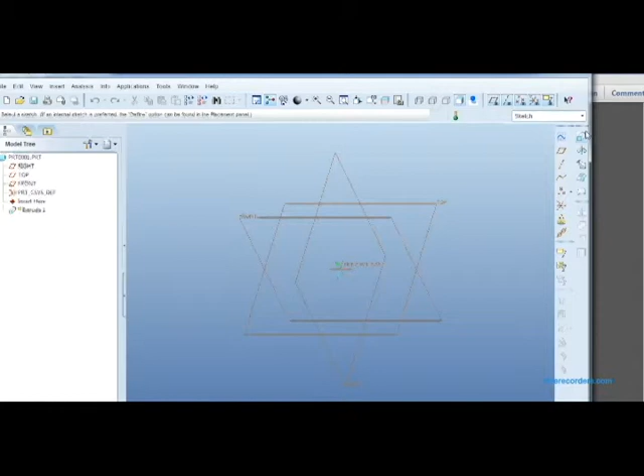This video shows how to make a cam assembly in ProE. First we open a new file. Let's check, this is part 1 for the cam assembly file. We have to make this part.

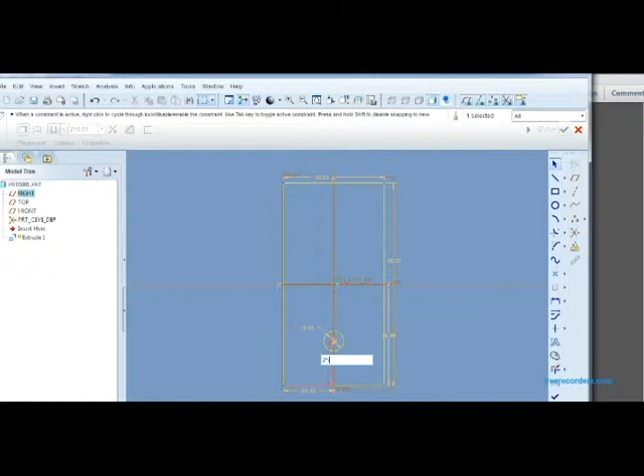Take a front plane, then sketch, make a rectangle of 50 by 100. We make the sketch as per the dimensions. Then okay, giving the depth as 5 mm. This is, we save part 1.

Now we have to make a new part. This is part 2, it's a cam pin. The dimension of the cam pin is shown here.

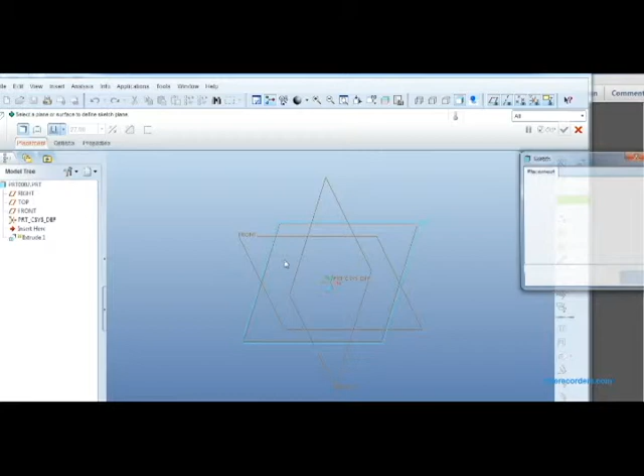Once again, extrude placement defined, taking a front plane and making a circle with the dimension of 10, and giving the z direction value 20 mm.

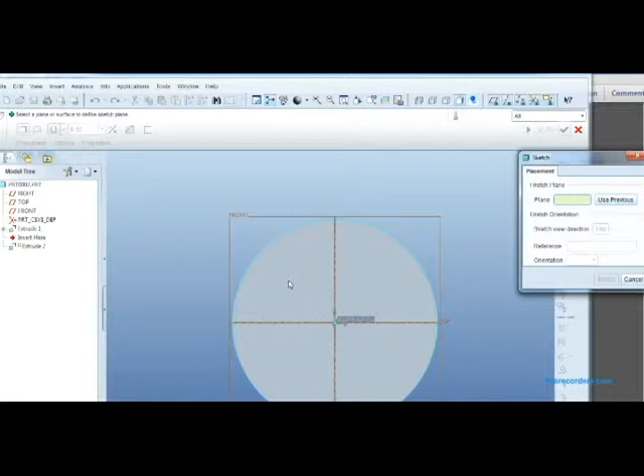Okay, now we have to make a key in on this pin plane. Sketch, taking reference of outer circle of this pin, and now making a key by a square of 2 by 2.

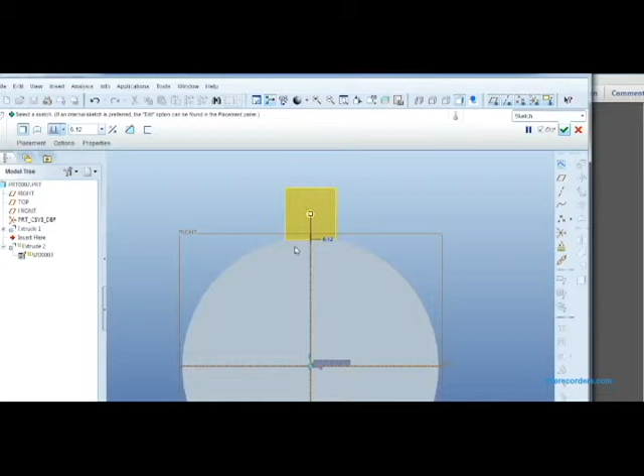Flipping the direction of extrude, the dimension of extrude is 10. And then okay, and also save this part.

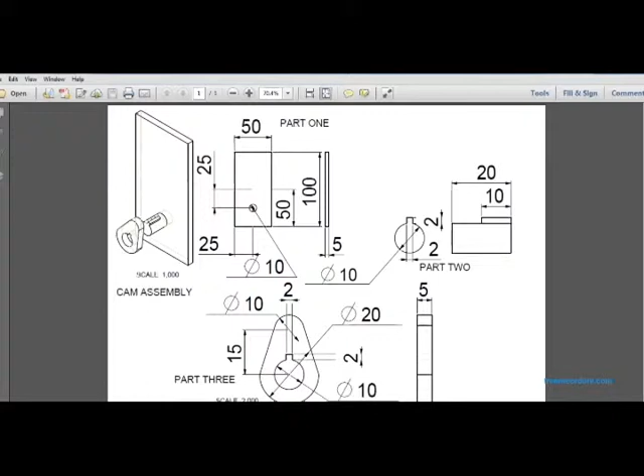Now we have to make a third part, is a cam. The dimension is shown here. There is basically a combination of two circles.

Now we are taking a new part file, then extrude, placement, define, taking a front plane as a sketch plane, then sketch. There we are approaching like two circles. The upper circle dia is 10 and lower circle dia is 20.

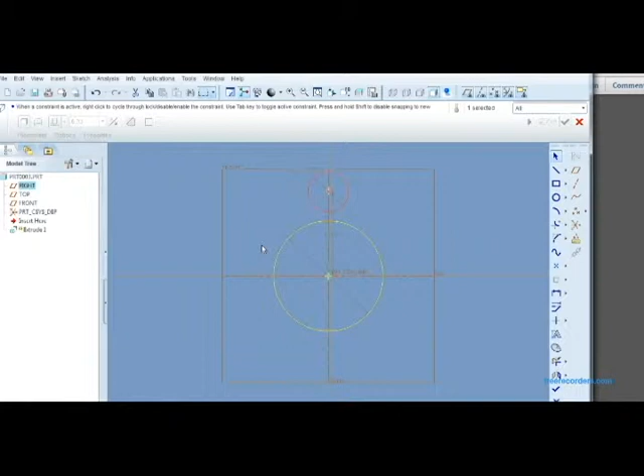This is the bigger circle and this is the smaller circle, and now I'm giving the dimension of both of them. This is 20 and this is 10, and the center distance between both circles is 15.

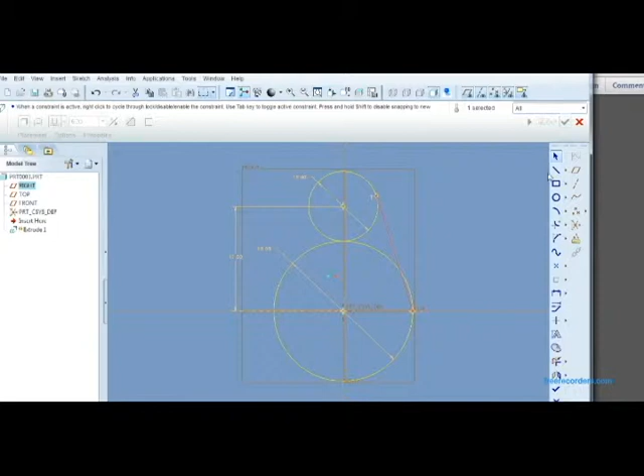Now I have to make a line that goes tangent through the smaller circle. A small t shows that this line is tangent at this circle at this point. Now, this is the other end.

Now I have to remove extra lines by the trimming option.

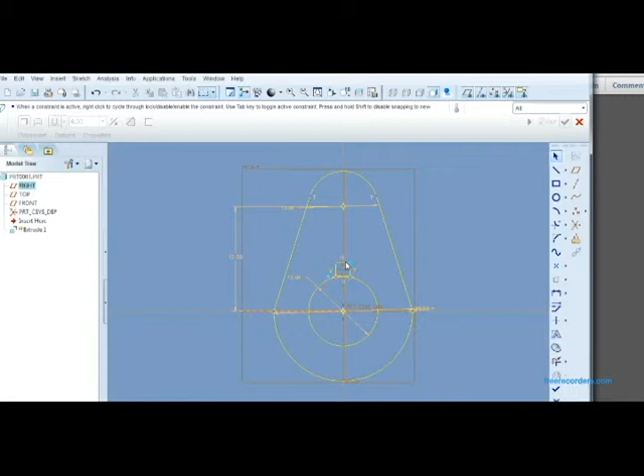Now I am making a hole for a key pin, dimension 10, and also making the key slot here so the key fits with the cam. It's a 2 by 2.

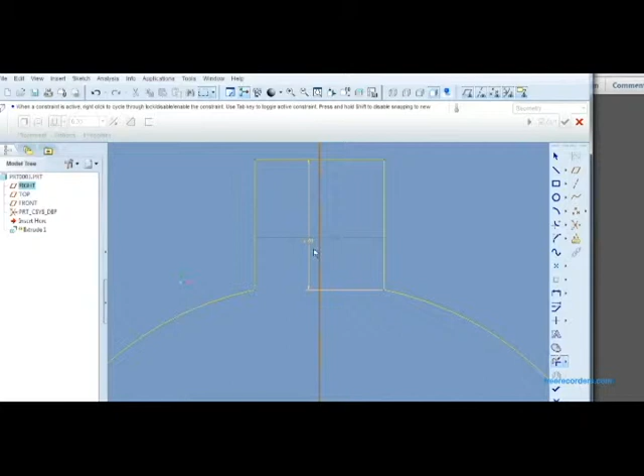Now trimming the extra lines, then okay. Giving the depth as 5.

Then okay, now we have made all three parts, and you can see there is one edge shown. Now I will explain this edge in the final assembly of the cam follower.

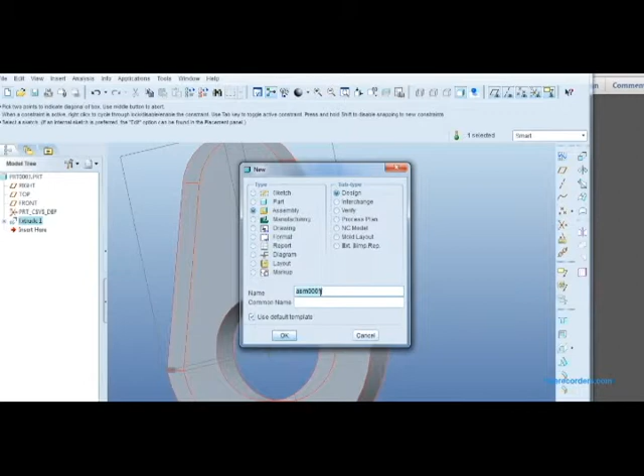Now making, open a new assembly file. Now we have to insert a component by clicking on this tab. Now I have to check which of my parts we have to check by preview.

This is the base plate part, and here it's imported in the assembly as the first base part.

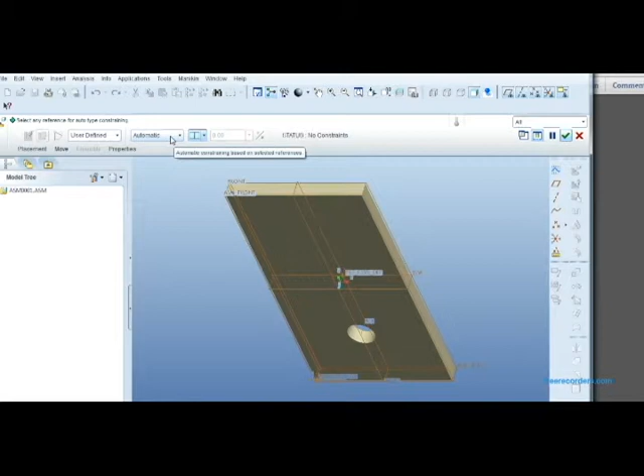So I have to fix this component in the assembly by using a default constraint. Now this is fully constrained, the color of the component has changed, and the status is also fully constrained. Then okay, now insert or call a new component, which is a key.

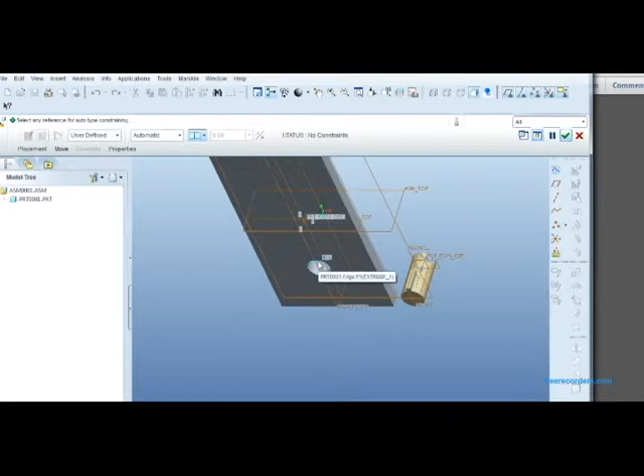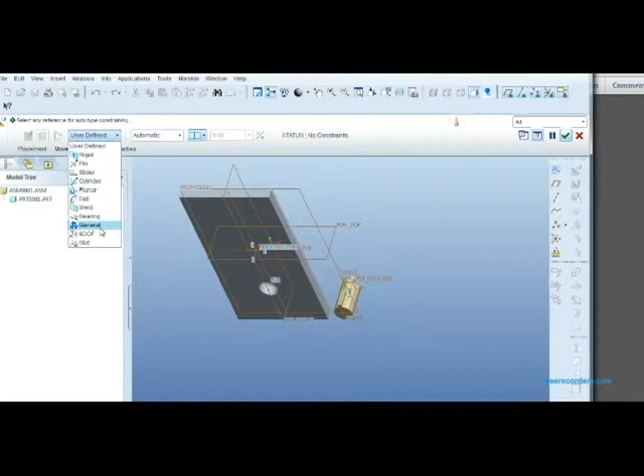I have to insert this key in this hole. There are lots of options or constraints available, using a combination of different constraints to assemble this key with the base plate.

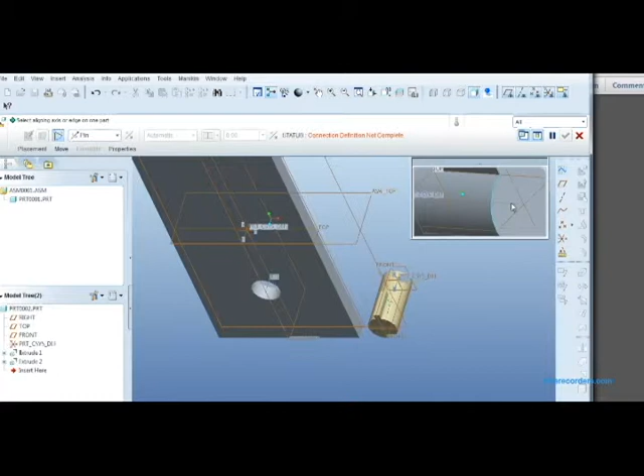There are some user-defined kinematic links already defined. We have to use a pin joint to assemble this because we want 1 degree of freedom, meaning we want to rotate this pin.

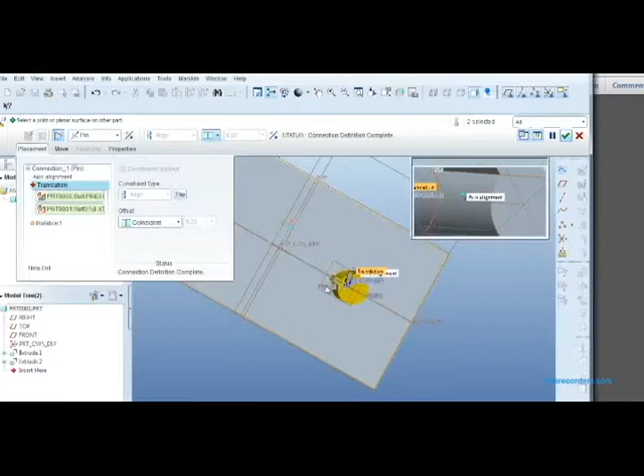First we give axis alignment, then we control translation by selecting this surface and this surface of the base plate. Now the connection definition is complete. We see the color of the pin has changed, and the status also shows connection definition complete.

Then okay, now we have to check if our main purpose, the pin rotating, works or not, by using the drag tool, clicking on any edge and giving the mouse rotation. Yes, our key is rotating.

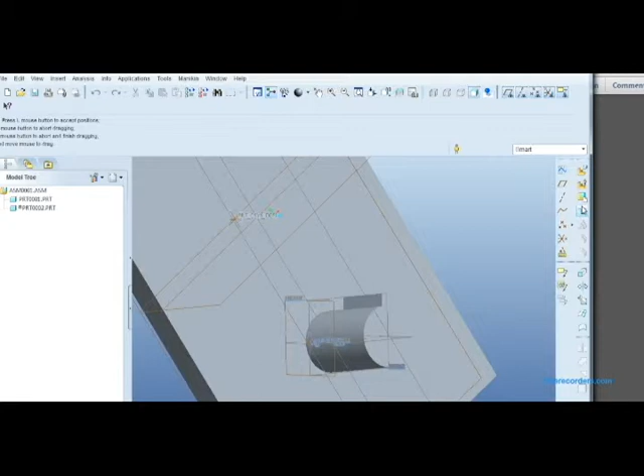And also check the translation motion. Yes, there is no translation motion, only rotation motion. Now we have to call a third part, which is a cam.

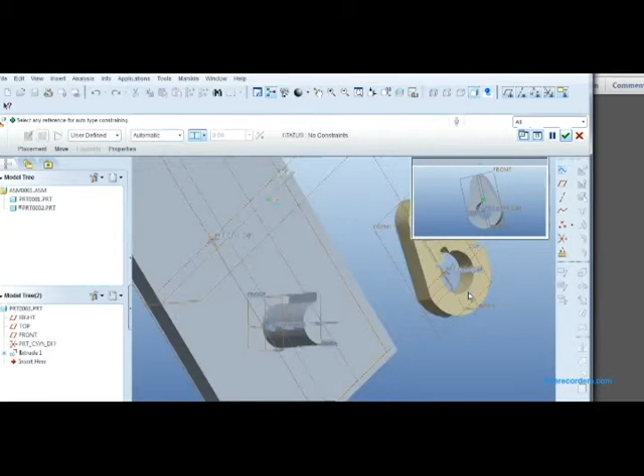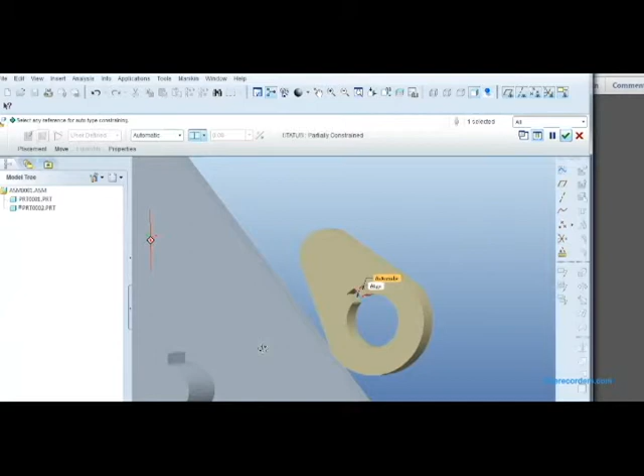Now I have to assemble this cam onto this pin with the key slot available in the cam. There are also lots of combinations we can use to fully constrain this cam. We are using some of them.

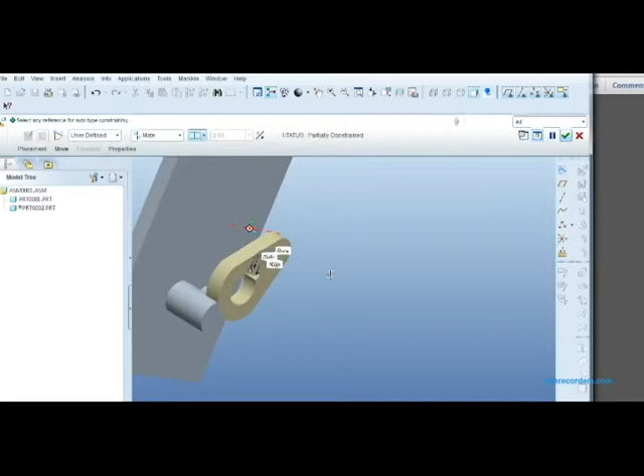I'm using one mate, one align, and a third one is mate, but this is a partial constraint, not fulfilled this time. So I have to delete all three. I'm using another one, just like inserting this cam on the pin.

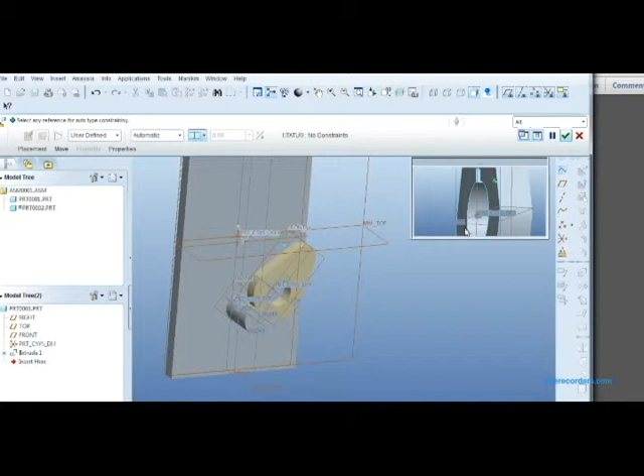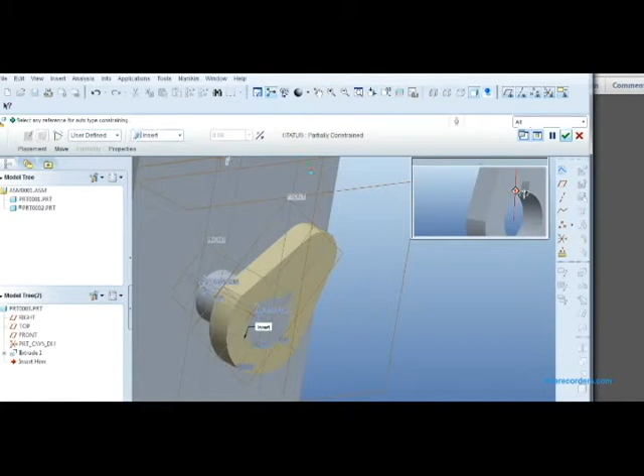Now just taking the inner, first we select the component surface, the inner circle of the cam, and then the outer circle of the pin. Now this pin is inserted, the cam is inserted on the pin.

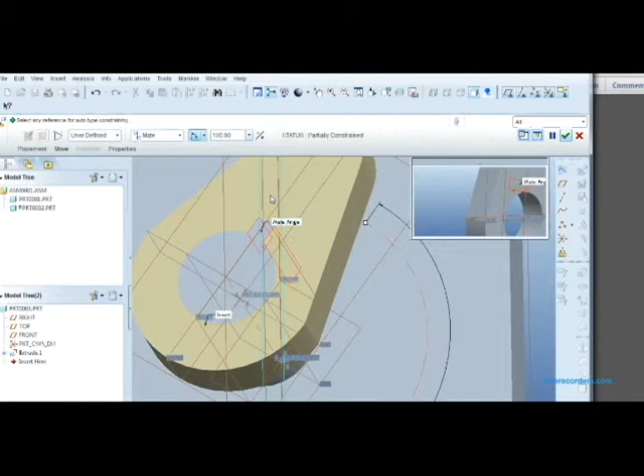Now I have to select one key surface, align with the pin key, and give the angle offset of approximately 180 to fix it properly.

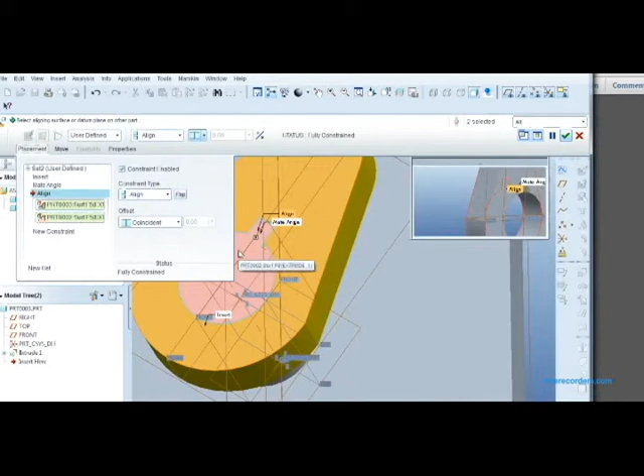And last we align the surfaces of key and cam. The component is fully constrained, the color of the component has changed, and we use insert, mate angle and align constraints to assemble this key on the pin.

Then done. Now we have to check if our cam is rotating or not. We are using the drag tool. Yes, the cam is rotating.